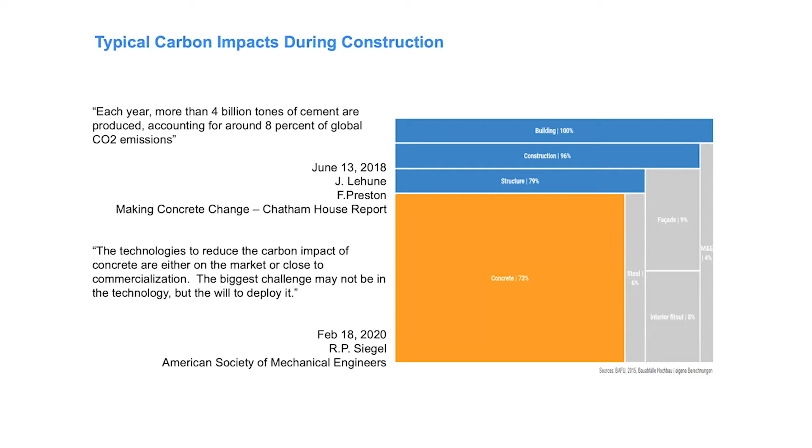Here's where we see Buy Clean policy come into place.

So just a quick refresher of what Buy Clean policy is. It's a three-pronged policy approach that starts with disclosure, requiring individual product-specific EPDs to be submitted at the time of bid to compare equal materials. Then it goes on to set a standard based on performance, and then uses that standard to drive the reduction in carbon emissions. Lastly, Buy Clean policies will oftentimes provide incentives to increase participation in the Buy Clean program, to help producers transition from older technology to new technology, or reward innovators and industry leaders to continue pushing low carbon solutions.

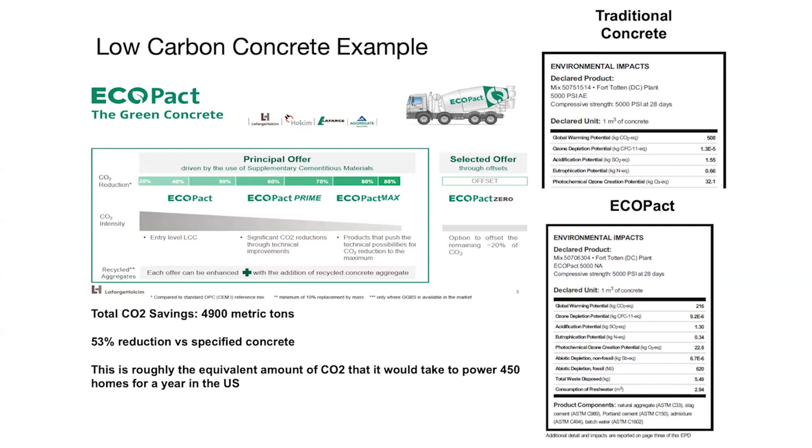And we've seen this from experience. The government of Canada made the decision that they were only going to procure low carbon cement, and over time, across all operations in Canada, the only thing you can buy today in Canada is low carbon cement.

So we're very optimistic that working with Congress and the administration, we're going to be able to implement policies that help reduce embodied carbon in the built environment, while creating competition and transparency in the building materials industry. As our presenters will discuss, EPDs are a very powerful tool that provide good incentive for the industry to continue to compete and reduce our carbon emission footprints.

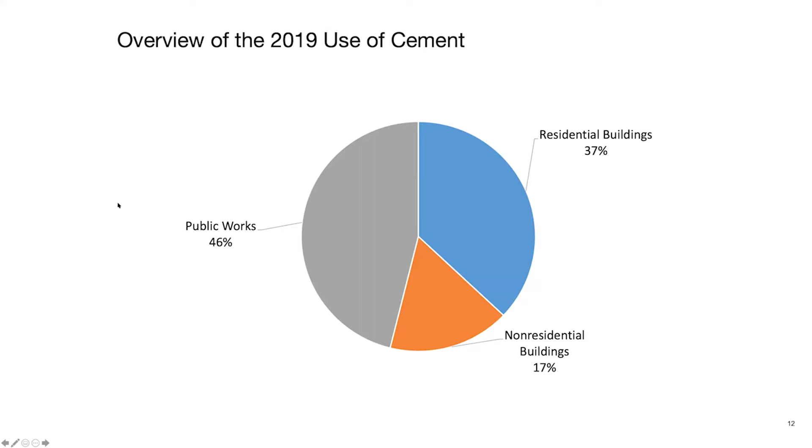And with that, I'll pause for questions or wait until the end, whatever you decide, Marina. Let's take questions at the end when everyone's presented - actually, we have a couple questions that have come in, so let's take two. When we look at the development of EPDs, as Don had alluded to earlier...

For Lafarge-Holcim, are the EPDs facility specific? How long does it typically take to produce an EPD?

Yeah, so EPDs have been around for a long time, and they were traditionally used as an industry benchmark. A lot of individuals will have an EPD, but it will be an industry-wide EPD. We made the decision last year to move to product-specific EPDs, and each operation will be different. To get a third-party validated EPD certificate, you usually need about 1 year's worth of production data submitted to the third party.

So you're doing it from a product, not just a plant. We did individual EPDs for our 13 cement plants across the United States, and then we're doing EPDs for our individual ready-mix concrete blends. I think we're 100% complete in the Mid-Atlantic region, and we're slowly moving our way through other regions in our operational footprint.

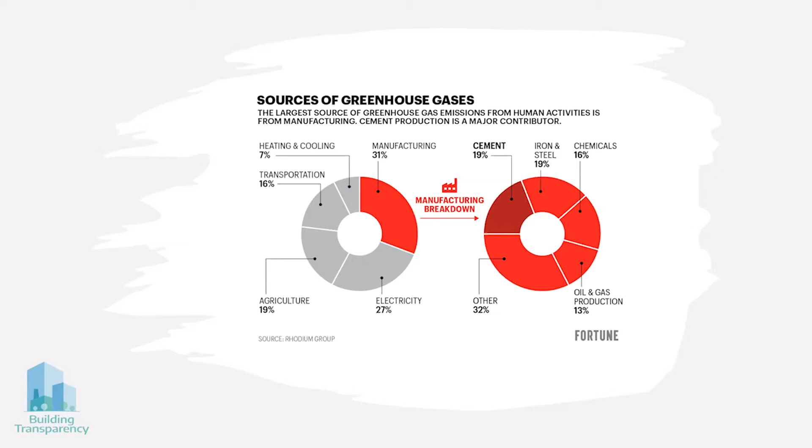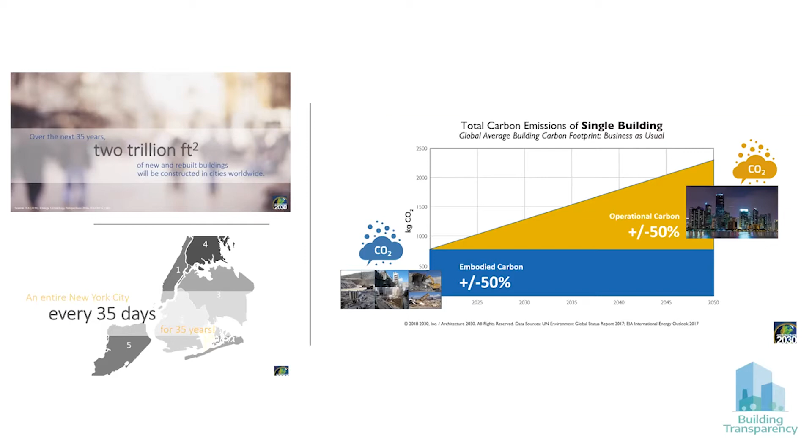Just briefly, I typically use this slide when talking about these emissions because we are talking about manufacturing emissions of the key materials we use to make construction products, particularly cement and steel, which are a large component of these greenhouse gas emissions for manufacturing, as well as chemicals and where a lot of the other construction materials live. It's because we now realize that embodied carbon emissions of the built environment account for more than 50% typically now if we're looking at zero carbon targets of 2040 to 2050. We're building a lot and we need to reduce these emissions as quickly as we can.

You saw some of the touch points on public policy. We tend to think of things through the lens of policy on both the private side and the public side. Those policies can be aligned and the same, and that's what sends the biggest market signal. So our large corporate partners that are looking at this are setting zero carbon targets, including their supply chain emissions, and trying to come up with those policies they can put in their procurement language that maps very similarly to Buy Clean language on the public side.

As Leo mentioned, there's also Buy Clean policies that we're supporting through EC3, where we have compliance filters that enable the searching and sorting of the data through EPDs within the tool to meet different compliance requirements as these legislations pop up.

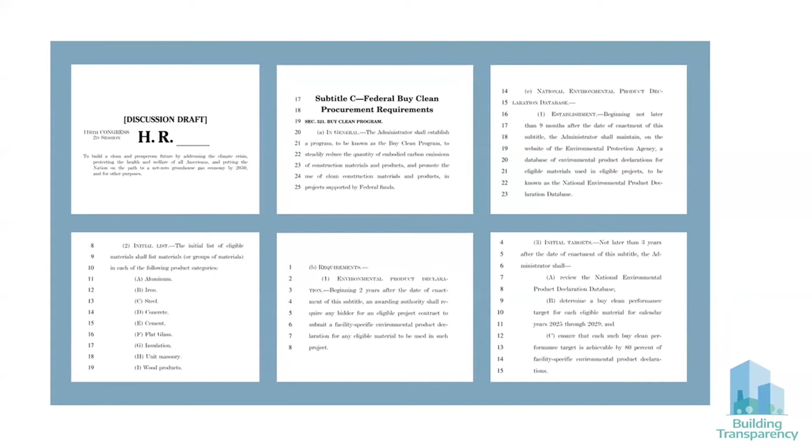There's also language being proposed in federal policies like the Clean Future Act and other avenues like the GSA, where the same kind of language is being specified and proposed. So the question is, how do we actually support all of those policies and enable adoption of EPDs and disclosure, as well as reduction?

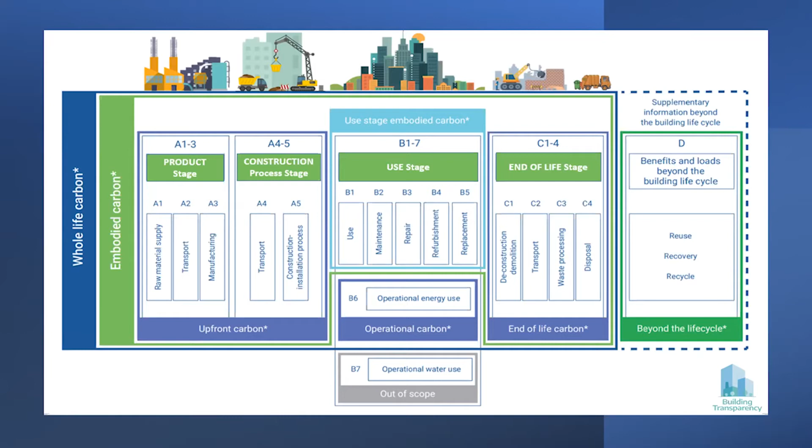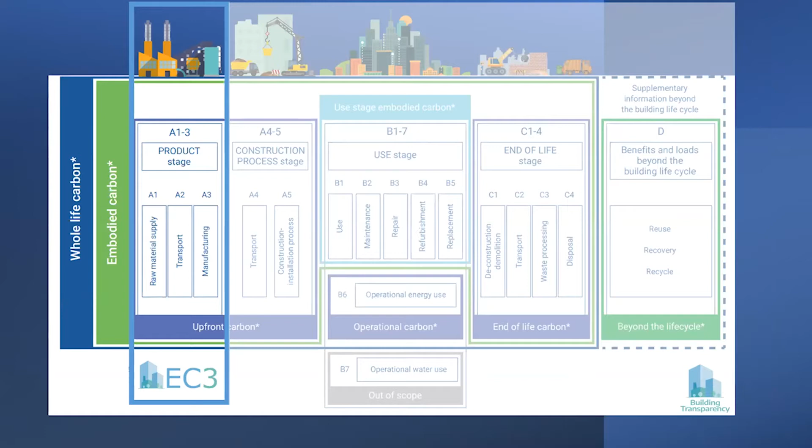EC3 and building transparency understand there are different life cycle stages of products and building emissions when it comes to embodied carbon. The EC3 tool is keenly focused on the product emission stage to date, in that procurement lens, because that's where 50 to 70% of the emissions can be, depending on the product, maybe even more for higher emitting manufacturing processes.

EC3 is a free tool, so it's available for free on the website. I'll get into that in a second in a very quick demo. And it's also transparent in terms of the data and how we're assessing it, and it's been informed by all of those partners that you saw on the screen.

You heard life cycle assessment in Dawn's presentation. We also need to make the point that EC3 is trying to fill the gap in this kind of procurement Buy Clean EPD category. LCA is still very important to use average emissions factors to look at your whole building reductions in terms of optimization of materials. Once you know what you're building out of is when you can use EC3 and EPDs to really source the lowest carbon options per material category.

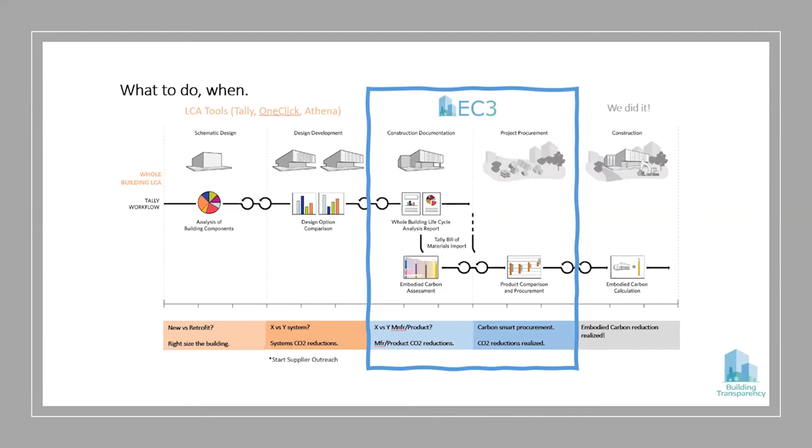What EC3 does is allow you to do a find-and-compare materials search of the EPD database that we've digitized. We've crowdsourced all of the EPDs currently available and published and turned them into digital documents that can be searched and queried to enable sorts and filtering. And then also at a project level, where you can take quantities of materials from construction estimates or BIM models and multiply them by these carbon intensity factors of the products you're using or proposing.

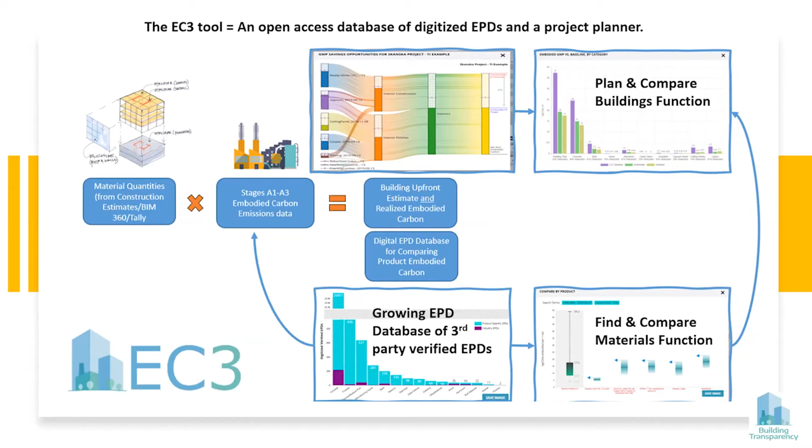We're digitizing these EPDs, keenly focused on the global warming potential per unit right now, with plans to expand to other impacts over time.

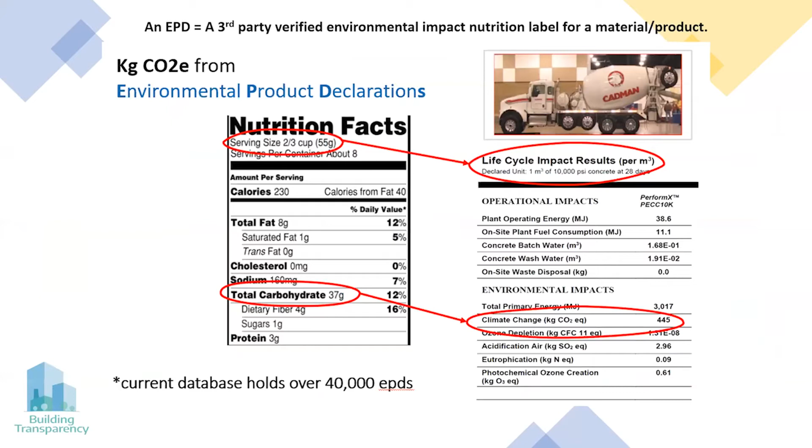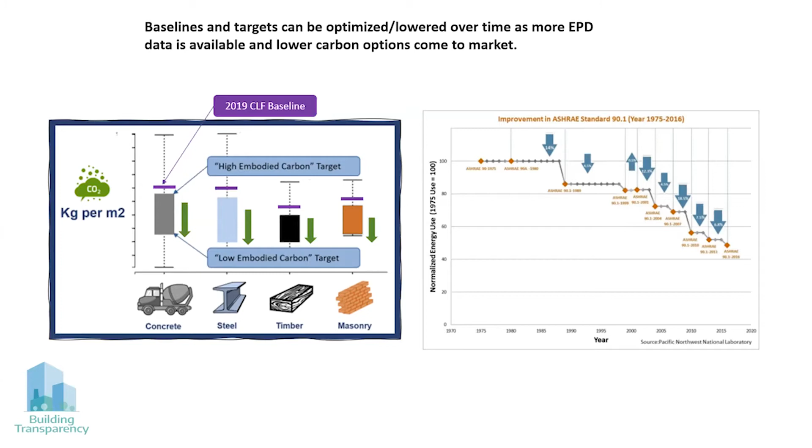Very quickly, because I know we have a lot of presenters, I just want to walk through the tool so you can see it in action. You can register for free at the website buildingtransparency.org to gain access yourself.

A policymaker, a contractor or a designer can go into the tool and understand where we're having EPDs globally in the database. For concretes, as Leo mentioned, we have an on-demand EPD integration that allows ready-mix suppliers to create digital EPDs that translate directly into the tool. That was really led here in North America.

In the tool, you can actually search and sort all the data. So I can go into ReadyMix, and you can see all the categories that we have. You can sort by performance characteristics like strength, and you can sort by geography.

If I pick Washington, where I am, where I know we've got good adoption, I can now search for EPDs in Washington state. It's going to return all of the suppliers and product-specific EPDs that we have in the tool. You can see we have 429. Each one of these is a digital EPD that gives you the manufacturer, the plant, the mix ID, the strength, and the carbon content per unit.

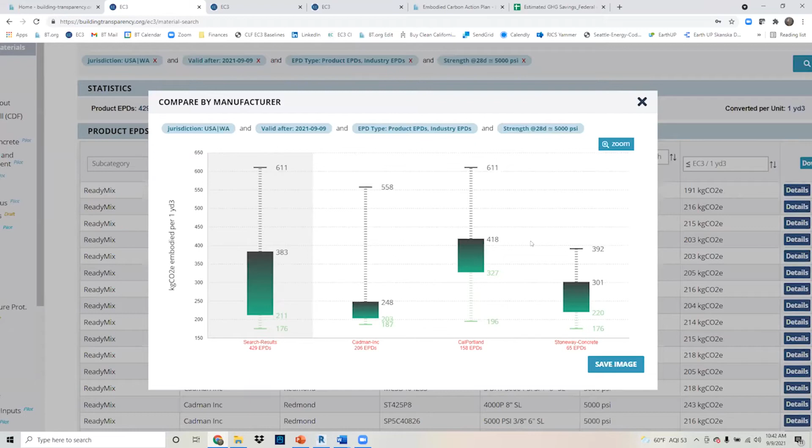This compare feature is really what's been helping procurement understand who has EPDs, what level of adoption we have, what their ranges of carbon content are for their mixes, and where could limits or benchmarks be set that enables multiple bids. This also incentivizes the suppliers to reduce their carbon emissions.

Very quickly on the building side, it's a similar thing where you can put in building information, material descriptions and quantities, do those same searches to get to collections of data for your supply chain, see who has EPDs, what are the ranges of carbon, actually select the EPDs you use, and get to summary charts.

These charts enable you to see the relative impacts of different material categories - what is my concrete impact compared to rebar, aluminum, insulation, glass, etc. What's the available reduction potential based on the EPDs in the supply chain at market? And what did I do from a selected material standpoint during procurement? All of this is what the EC3 tool is trying to make available to people.

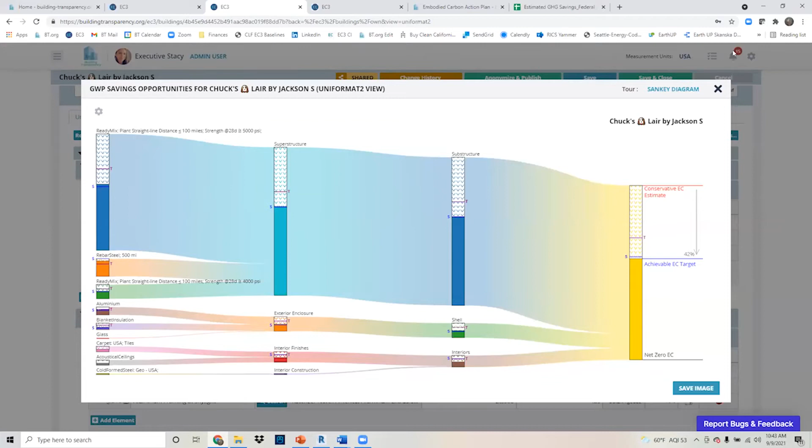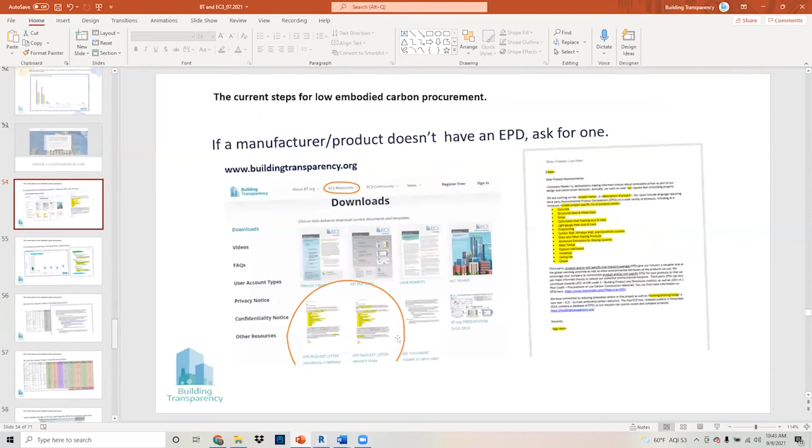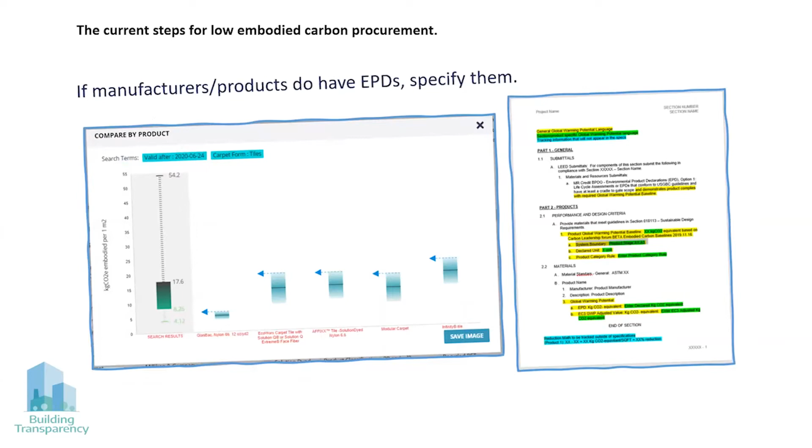The last thing I'd say, from what we're seeing on the private sector side, is that there are steps that seem consistent whether it's private or public policy. It's requiring EPDs, asking for them if they don't exist. It's specifying products that have them during the specification process. It's bidding that into your bid documents, the request for EPDs or requirement.

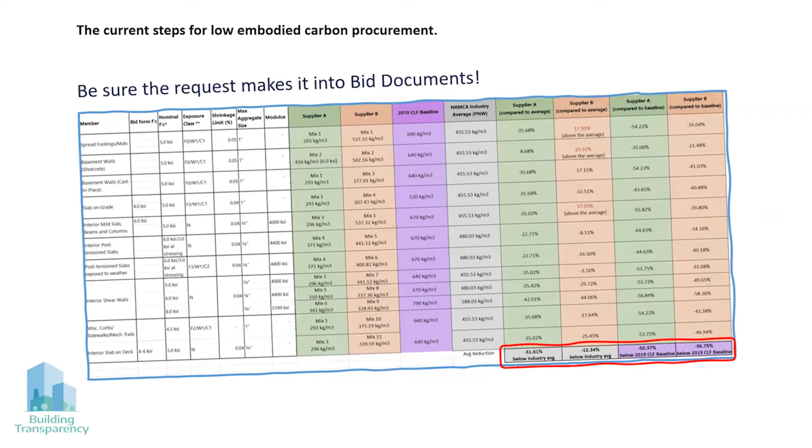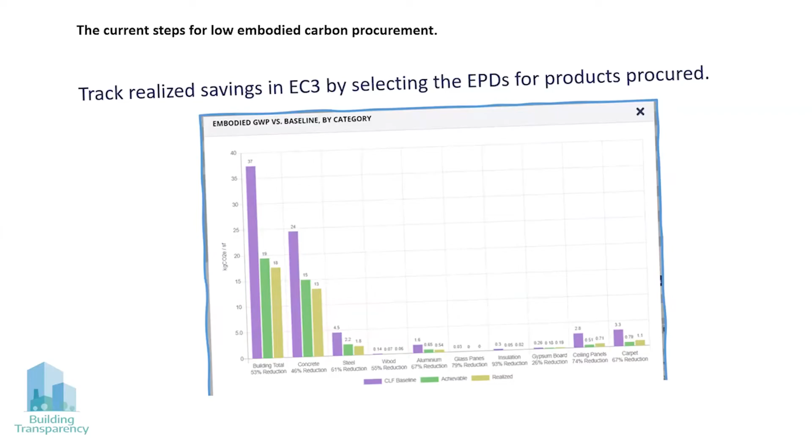It's then using that data at bid leveling time to understand who's the lowest carbon option next to cost. And then it's actually realizing your savings and documenting that to get to an actual carbon content of your projects using EC3. Just a final note, the tool is getting broad adoption globally with over 16,000 users. We're seeing around 2,000 projects already in the tool to help us with benchmarking.

This is just an example of last year in the markets where we had concrete EPDs and used them. We saw about a 30% reduction from baseline at no cost premium using EPDs during procurement to incentivize carbon competition.

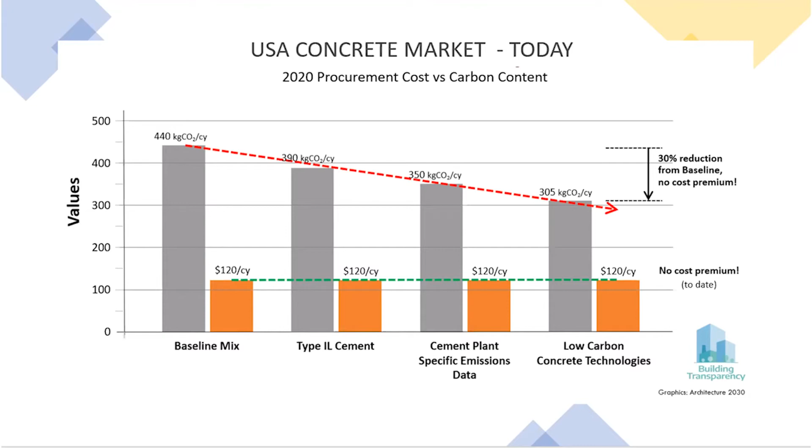Just an example in the Washington market where we've had 3 suppliers with EPDs for about a year now, where they've been required in large projects like the Microsoft Campus project. We've seen the whole collection of EPDs in terms of carbon content go down by upwards of 30% for the suppliers that are competing now on carbon and cost. So that's the reduction within the tool that you can start to track.

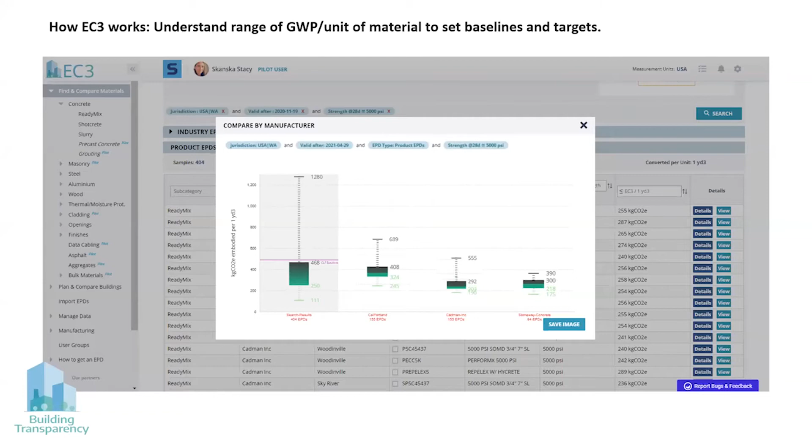That's really it. The one comment I wanted to make before we move on - I know that was a lot very quickly - is that we've done the math. And if we were able to achieve that 30% reduction for all US consumption of concrete and steel, that would be the equivalent to reducing 14 million cars on the road, or decommissioning 16 coal-fired power plants. That's really the potential of what this can do if we do it holistically across private and public procurement policy.

For anybody not familiar with Skanska, we are a global real estate development and construction company headquartered in Stockholm, Sweden. We have a presence across the Nordics, Central Europe, and the United States. The business unit I represent is Skanska USA Commercial Development, the owner-developer arm. We're active in 5 US markets: Washington DC, Boston, Houston, Seattle, and Los Angeles. We primarily deliver commercial office and multifamily projects.

Skanska has a long-term commitment to sustainability. On 100% of our CDUS projects, we do a minimum of LEED Gold, many achieve Platinum. We have a global carbon target to achieve carbon neutrality by 2045, and that includes not just our own operations but our value chain—the operational carbon and the embodied carbon upstream. We've got a 50% interim target in 2030.

This picks up on what all the panelists have talked about. There's a lot in the value chain: the operational carbon piece, which we've been focused on for many decades and will continue to be—so it's not either/or with embodied or operational, it's really an 'and.' Then there's the embodied carbon side, where we really have one-time bite at the apple. With operational, you can do retrofits and upgrades over a building's lifetime to improve energy efficiency, but you only get one opportunity to make your material and supplier selections for the construction materials used to build that building.

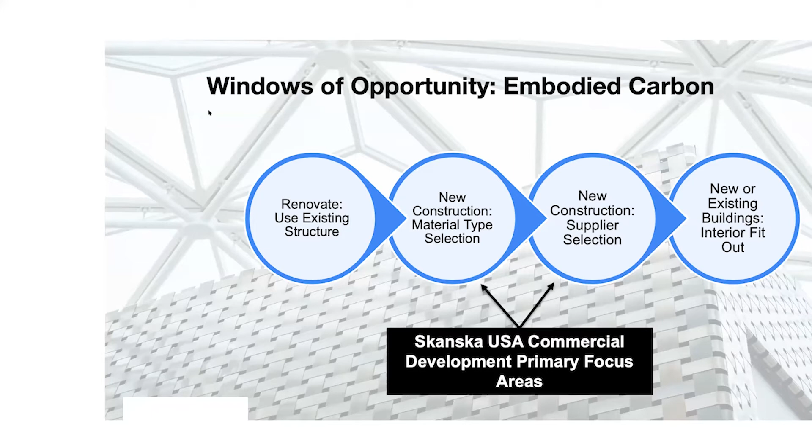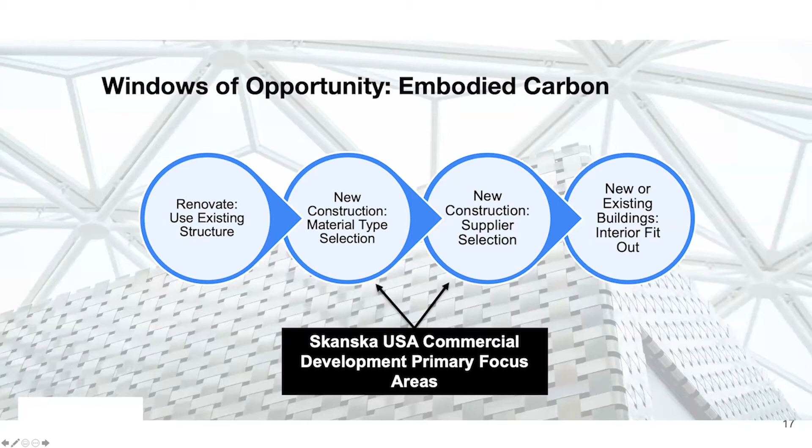Last but not least, there are the interior fit-outs. You might think you don't have control over a whole building because you're not doing new construction, but you may be a tenant at a building. There's an opportunity, if you're building out an interior space, to think about procuring carpet, ceiling tile, wallboard, paint, and furniture—lots of opportunities there to reduce embodied carbon. My perspective is focused mostly on those middle two areas around new construction, but there's huge opportunity for probably everybody on the phone to think about where you could have an impact.

I wanted to share a quick case study of a project in Bellevue, Washington, just outside of Seattle. Skanska Commercial Development is using the EC3 tool, which we just heard about from Stacy, on all of our projects in the US. This is one example of a project that just recently started construction.

We really took a strong focus on the structure. We lasered in on concrete, structural steel, and rebar as the opportunities where we wanted to see what we could do to move the market and reduce our embodied carbon.

Ahead of our bid process, ahead of sending out that bid package to our suppliers, we worked closely with our structural engineer to update our concrete specifications to include some of those carbon intensity targets, a requirement for plant-specific EPDs, and then we sent that out to the market, got good bids back, and ultimately we were able to achieve a 50% reduction in embodied carbon when we look just at the concrete and rebar supplier selection.

That was at largely no additional cost or impact to schedule, but it was just about being transparent and looking for that carbon intensity and factoring it in as we made that supplier selection, still considering cost, still considering schedule and performance. If you think about all of the material categories for that whole core and shell, including the envelope and the structural steel, what we've been able to do to date is about a 30% reduction across all of those material scopes.

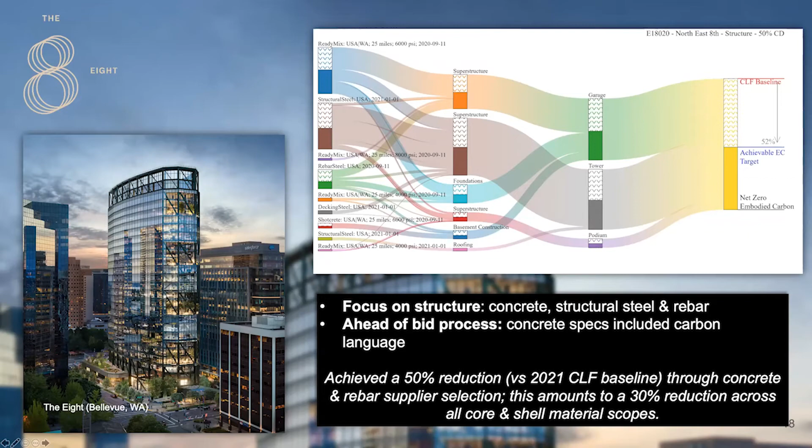Last but not least, some lessons learned so far from my perspective. Number one, collaboration is key. You're not going to be able to do this by yourself as an owner or a contractor. You really have to have a lot of collaboration, and the structural engineer is a really critical player too.

Number two, incremental progress is still progress. It can be overwhelming to try to tackle an entire building and all the different material scopes and try to reduce embodied carbon in all of them. It's okay to just start with concrete or just start with rebar. In one of our markets in Houston, there weren't plant-specific EPDs for concrete, and so our real goal was, can we get one supplier to commit to do that? We were recently able to do that, which was a big milestone for us.

The third, inertia is real and timing matters. This isn't rocket science, but it is adding a new factor to material procurement and the supplier selection process. That is something construction companies are used to doing again and again, and it is a new thing and can be challenging to add something new to any process. Stacy hinted at this, but it's important to make sure that when you get to the point where you've collected your bids, you've asked for this, you've done all this work, make sure that when you are leveling those bids, you're remembering to think about this carbon piece and incorporate it into your decision-making.

And then the last one, demand shifts markets. This is really where I think it's the biggest take-home lesson, and it's the biggest reason why we're all here today and why the federal government's role is so important. The more voices that are asking for material suppliers to deliver these plant or mill specific EPDs, the better. More interest from big building owners, including the federal government, policymakers, federal, state and local governments, tenants, investors, is really going to help accelerate progress. So the more we can do, the more voices that are out there and the more collaboration across the supply chain, I think the faster we're going to see really transformative change.